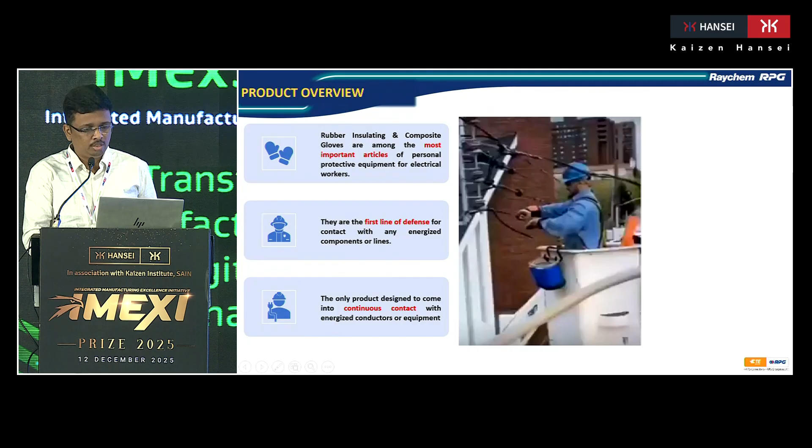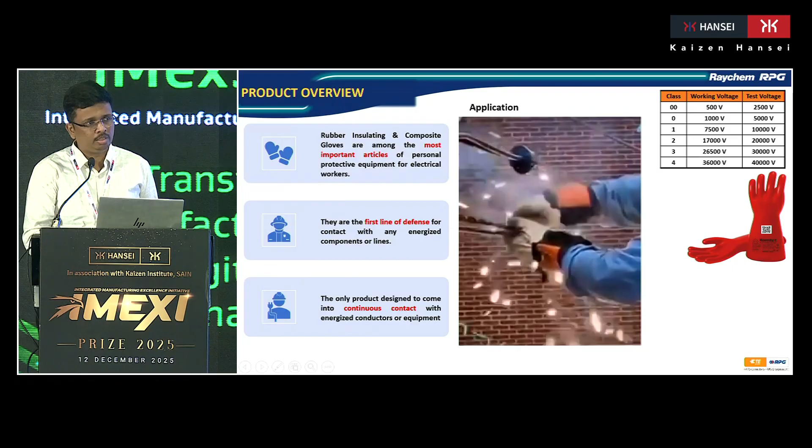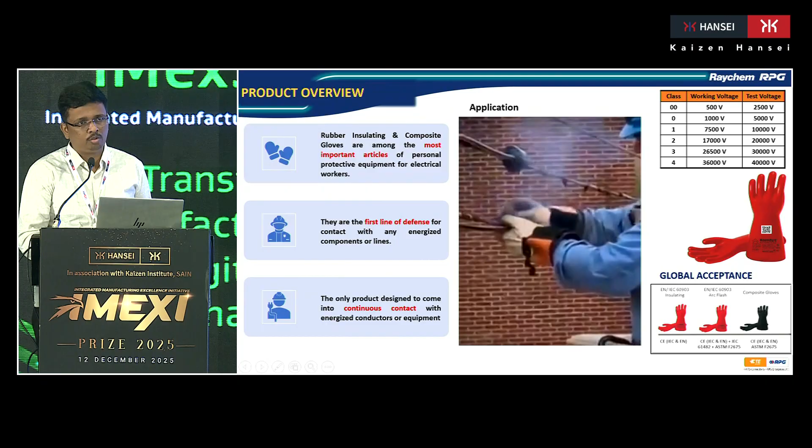Today I am going to talk about one of the products we manufacture at this plant, which is called electrical insulating gloves. It is a category 3 safety product which deals with direct contact with live wire working. It is directly used by the workman on a live wire, and there are 6 SKUs in this product. We manufacture all 6 SKUs from a working voltage of 500 volts to 36,000 volts, as per the compliance of global standards like IEC 60903 and EN 60903.

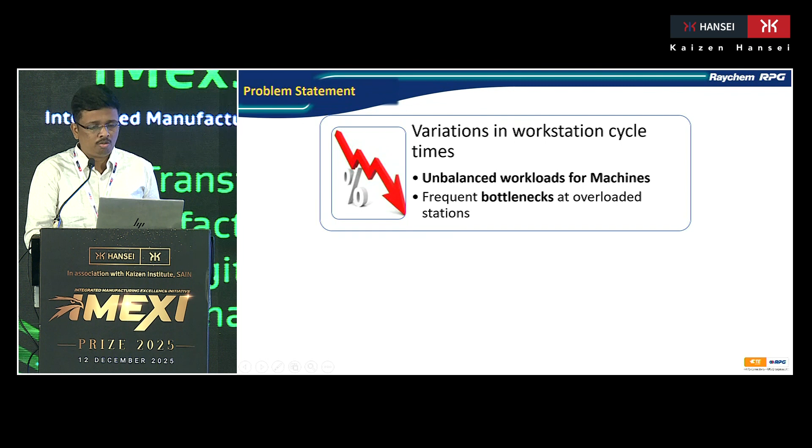So what was the problem statement? The current problem in the electrical safety gloves line was unbalanced workload on the machines, which resulted in delay in supply to the customer, not being able to meet the delivery deadlines of the customer.

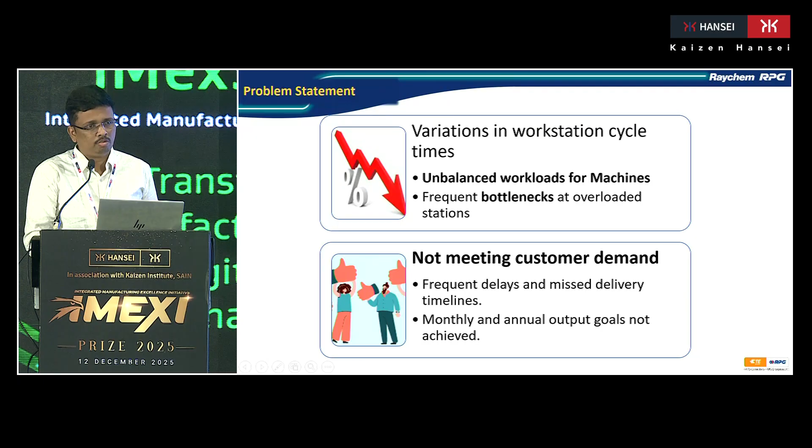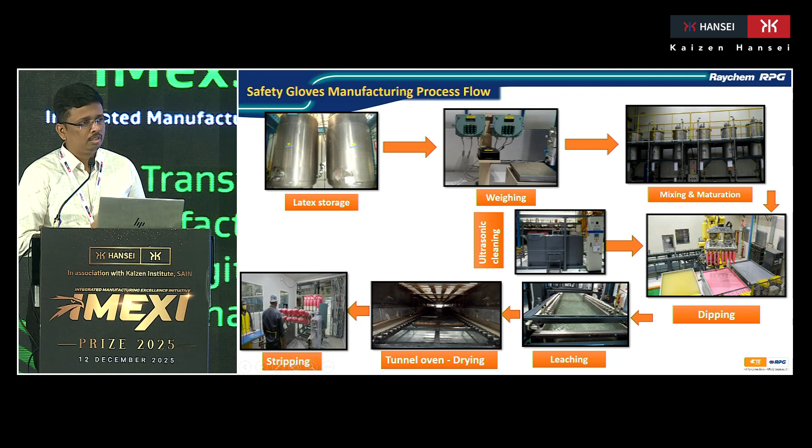I will go through the manufacturing process flow of the electrical safety gloves. It is a very long process. First we start with storage, the raw material storage of latex, which we buy. This is natural rubber. Then it goes for weighing, then maturation, then we do the dipping in our dipping cell, then it passes through the leaching process, oven, stripping. Then we mark each glove with a unique number. Then it goes to visual inspection, washing, tumble drying, oven conditioning, autoclave, cutting and chlorination.

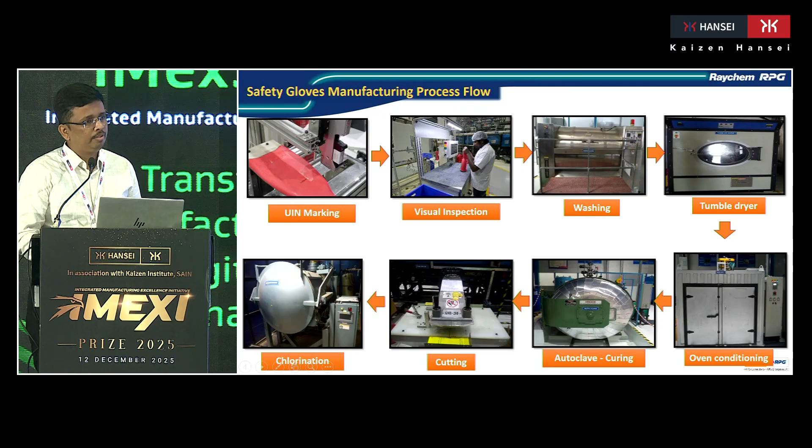After the chlorination, it goes to electrical testing. Each glove is tested at high voltage, at rated voltage, as per the standard. Then it goes to visual inspection, then printing and packaging happen. It is a very long process. A class 00 glove takes around 8 days to produce from dipping to packaging, and for class 4 it takes around 18 days. It's a very long process.

As it is a category 3 safety product, the customer is not ready to wait a longer duration of time to get the deliveries.

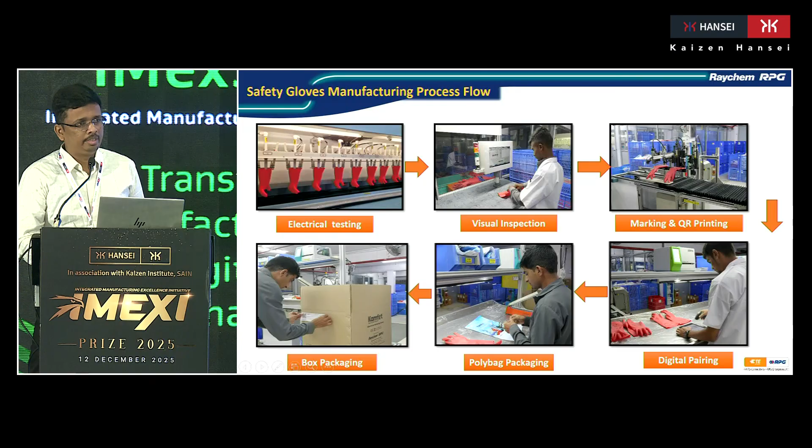After this identification, we made a plan for what capacity we require to build in these processes to meet customer demand and debottleneck our processes.

So we identified 4 processes which we need to debottleneck: the electrical testing machine, oven conditioning, washing, and the dipping process.

Then for this, we made the action plan to debottleneck these 4 processes. We started procurement of ovens, electrical testing machine, washing machine, and dryers. This will be in process and will be completed by January 26.

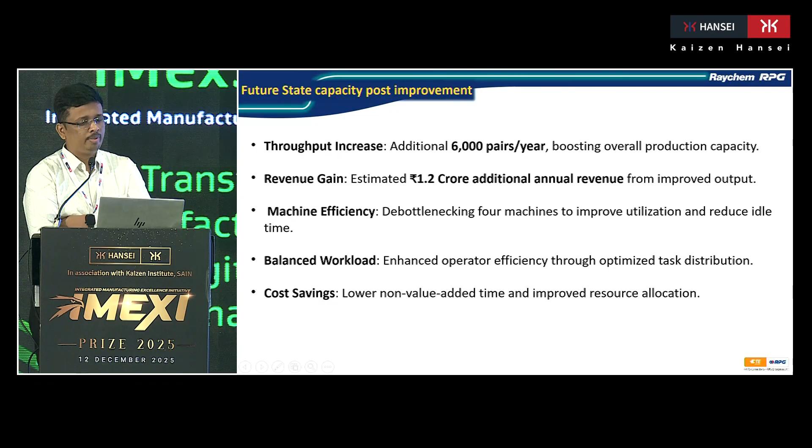After doing this improvement, we will be able to improve the throughput by 6,000 pairs per year, which will get us additional revenue of around 1.2 crore annually. Also, with this debottlenecking of the 4 machines, we will reduce idle time. It will also help us reduce non-value-added activities and improve resource allocation.